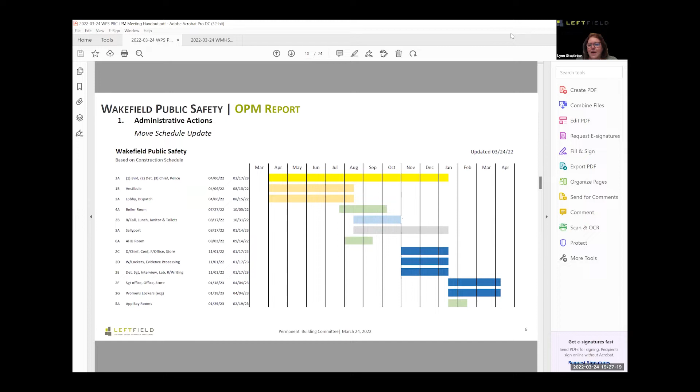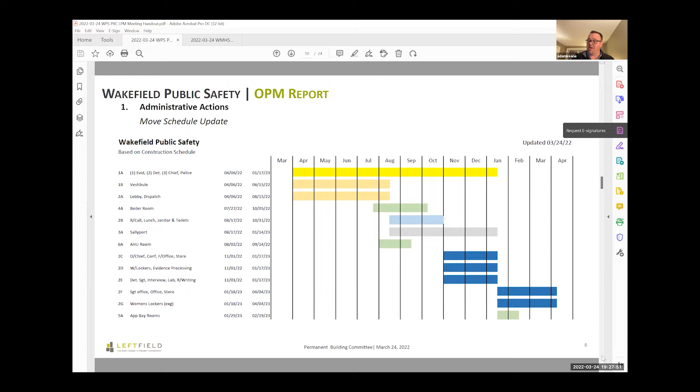Next is, hold on, a quick update on the move schedule. I'll hit this from a very high level. Lynn, we are working closely with police, fire, and town IT to do a move of reception, evidence, prosecutor office, and supply area. That'll be happening on April 5th. We're also going to be moving the police admin area, and that'll be the 5th through the 6th. That is to get some of these folks out of the way for the construction project to start on April 6th.

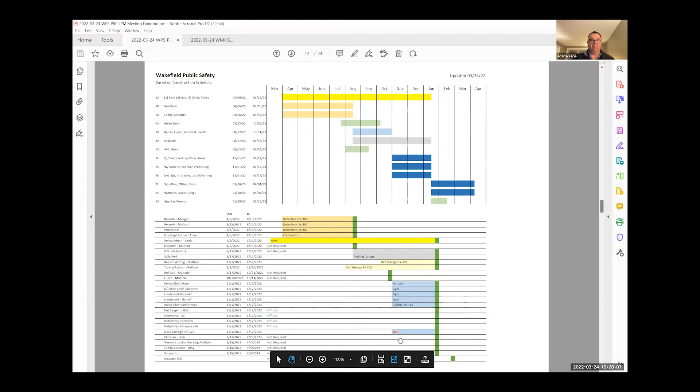I just don't want people to get confused. Evidence, he's referring to the records department. The general evidence will be moved later. They're in charge of evidence, but I didn't want people to think that evidence was being moved at this time. That comes later.

Thanks, Craig. I'll add one more thing - I've been in discussion with Ben, our building inspector, about our start date of April 6th. As we discussed last time, there's a 20-day appeal period from the planning board, and we're able to get our permit effective April 6th. We've got a lot of activities pointed at that date, and Ben is on board for that.

This pushes our substantial completion date out to April 5th, 2023, with a final completion of June 2nd, 2023. In your packet you should have received the full schedule from Bond, if you'd like to take a look at it. Does anybody have any questions on the schedule?

Next up is the temporary entrances. So these are the temp entrances during construction. Effective April 6th, these will be the new entrances - as we're looking at them, page left is police and page right is fire.

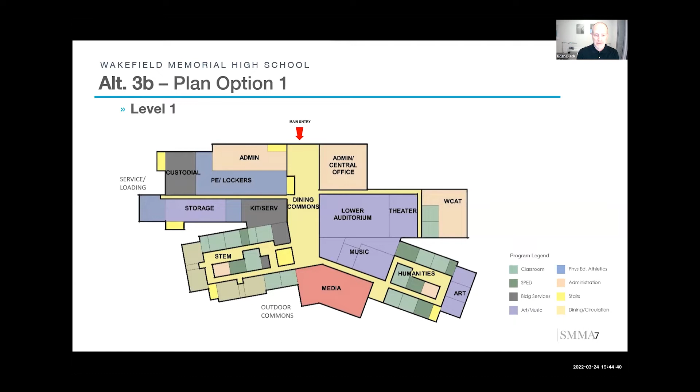Here, the media center takes kind of the center position between the academic clusters on that eastern side and really acts as the anchor or hub for the academic life of the school.

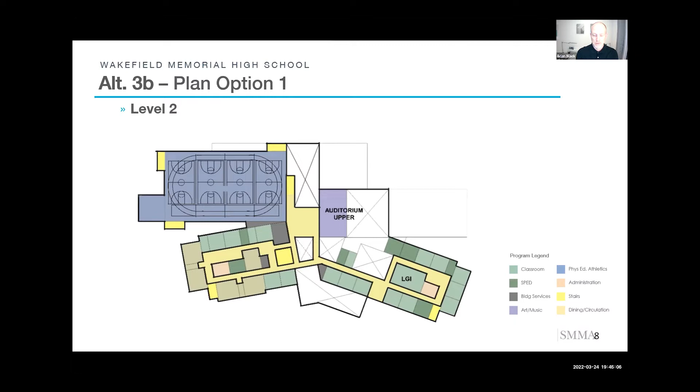Moving up, we see again the gym on one side, the upper auditorium on the other, and then coming through to the back of the school, the 2 academic clusters, again linked in the middle, and overlooking double-high space, which are the dining commons and even music rooms being looked in from the top. Those are high bay spaces. Level 3 rises up similarly with a link between the 2 clusters at level 3.

3D imagery showing, on the left, mainly the gym and part of the dining commons coming through. This is the piece that greets the visitor or building users upon entry. We've seen a really nice appreciation of the civic qualities of these options through the process, and I think it's understood that having a piece of building of that scale is a bit of a challenge.

And then on the right, academics facing that quieter side toward the wetland, there's lots of opportunity to engage with the landscape and to really use the wetland area as potentially a teaching resource.

Moving to option 2, flipping the diagram so that the academics and the well-scaled elevations of it are presented to the community, seen across the new Beasley Oval. On the backside now are the civic spaces of the gym and the auditorium, community use spaces, but also all of the academic programs associated with those, entered through the middle sliver of the dining commons space.

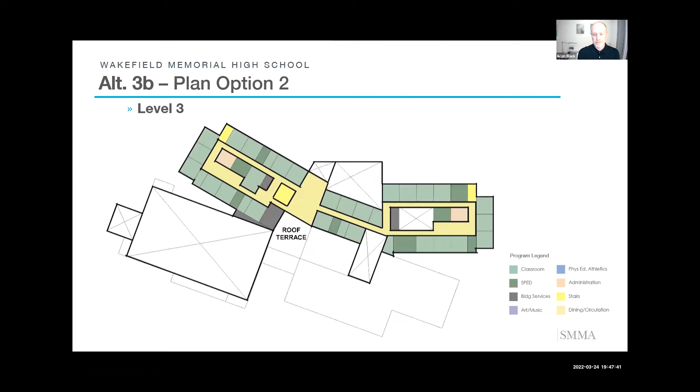Massing views of that scheme, again pushing the gym a little bit further back. Still has centrality to all of the fields, and the academics, again, are front and center.

Option 3, I think, has received maybe the most positive feedback, but that's not trying to color the presentation here. Just, I think that's a fact that we've all heard.

I think one of the reasons is that the academics are given kind of their space to maneuver, in this case facing south, having the ability to open out into outdoor space and protected outdoor space at the back of the building, and have a fairly clear diagram of the building. You walk in and academics are on one side, the gym and auditorium are on the other.

So there's a clarity to that I think was appreciated. Dining commons, again, is the central space linking all of the pieces. And then moving up, this plan has a little bit more accurate depiction of the 18,000 square foot gym between several of the phys ed alternatives and the gymnastics gym, which is currently in the program to be replicated in the new school.

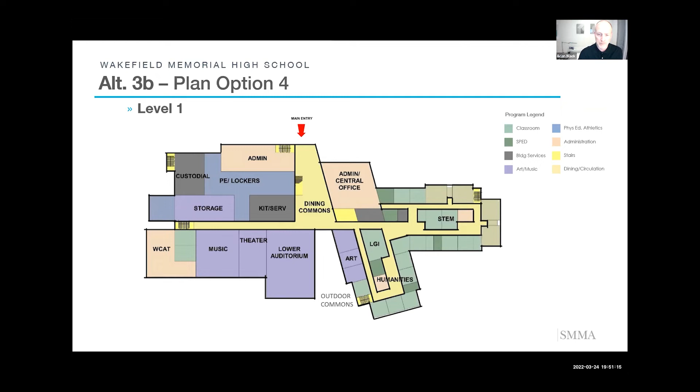Option 4, again, has the central commons, the admin and the media as being anchors to the academics, and then the gym and auditorium and other music, performing arts, those pieces on the south side in this case. That's option 4. And again, here we see the gym at the front again. So that's a factor.

So those are the 4 views, four schemes, I should say. Okay, happy to go back through any part of it.

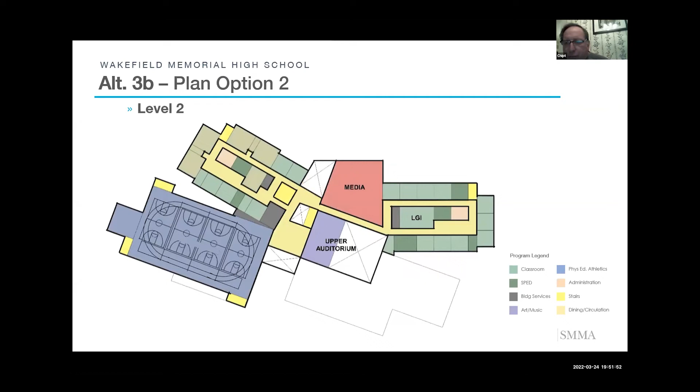So discussion. Joe, I think at this point, we've seen these many times, both in focus groups as well as in this group. And I think I would agree with Brian that, in fairness to March Madness, option 3 has jumped right out into the final bracket against the ad reno, from anything I've seen or heard, there's been a little pushback.

The only thing I would comment on option 3 is that as design moves forward, whether the gym's in front or back and those alleys, but from the teachers and everything else, the STEM and humanities, as well as their central office being on that left-hand side and all together, and the auditorium and the gym being on the other side, was a much preferred scheme. Kind of liked by a lot, not even close to the others. That's where I see it having come out.

Janine? I was not able to make the last public forum. What was the general feeling from feedback at the public forum as for the different options?

There were only a couple of comments. I recall them being in favor of option 3, just because, again, the academics are really almost a building to themselves, although we're going to try to make it very connected to all of it. But having that and facing south and getting plenty of sunlight and all of that, I think were appreciated moments of these diagrams.

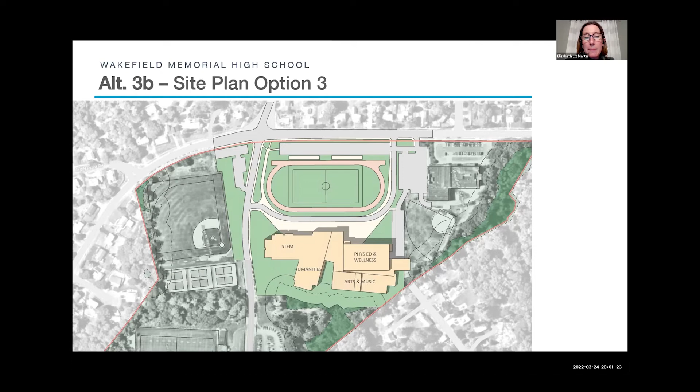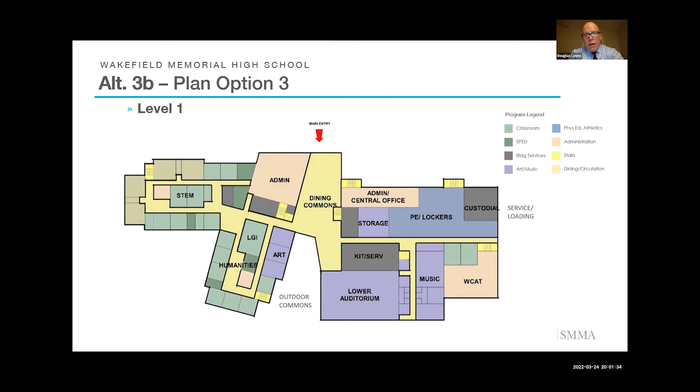Yeah, I think first of all, with the new construction, we looked at the different layouts. We liked the location of the academic wings and the way they were set up. We thought it offered a nice layout and conveniently kept everything together in regard to the sharing of resources and teachers being able to collaborate with one another. That was the biggest, most consistent thing that I heard, Liz.

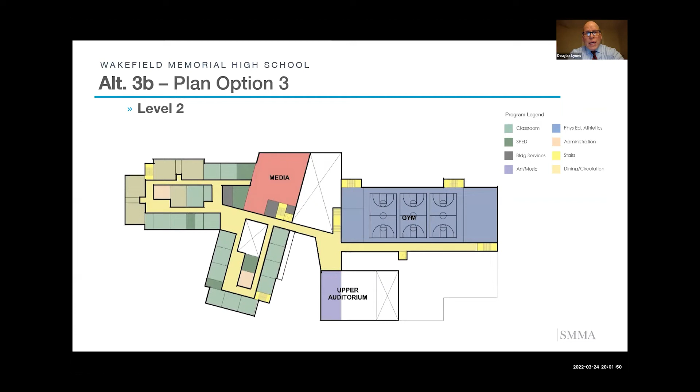Okay. Phil, I got a quick question. I know these aren't final designs, but do all these options represent opportunities for future expansion? During some of the working groups, we talked about having the structure built in a way that you could build onto it in the future. Are some of these options better than others for adding on in the future?

That's a good question. We haven't diagrammed that out yet. I think we should come back to you with more info on that, but I don't think there's a significant difference in how we would do that within the sub options. It's probably adding on to the end of the bar element - we know those are constrained. So we may have to look at creating something like a barbell, or a pavilion that comes out from it. But we certainly have a little bit of space, including in that V-shaped area, where we could project out again.

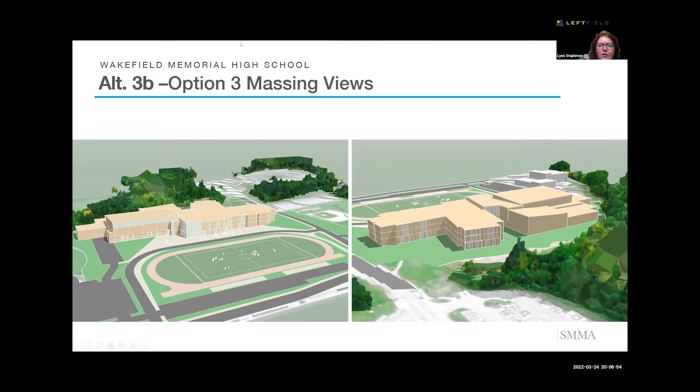Next agenda item, Lynn, is the field house update. As you all recall, when we submitted the preliminary design program to MSBA, we included a field house that was 30,000 square feet that could accommodate an indoor track, however tight. We did submit that to MSBA. They came back to us with a letter stating their policy was not to participate in projects that included a gymnasium or field house over 18,000 square feet.

We pushed back on them a little bit and asked whether the town could provide the field house separately from the high school project, meaning separately funded as a separate project, but run concurrently with the high school. They came back with their response that in order to do that, we had to provide a lot of information to satisfy them that the projects were completely separate, both from a funding and resource perspective. We couldn't use the same designers, the same construction manager, or the same OPM. They wanted it completely separate.

So we started to look at the diagrams you've been seeing, even on the screen tonight, you saw a 30,000 square foot gym included. We started to wonder if we could really do this connected to the existing building and manage to keep it separate. So we went back to MSBA again and asked for a more definitive answer. They told me we could not have an attached field house to the high school. There'd be no way to completely separate it if that were the case.